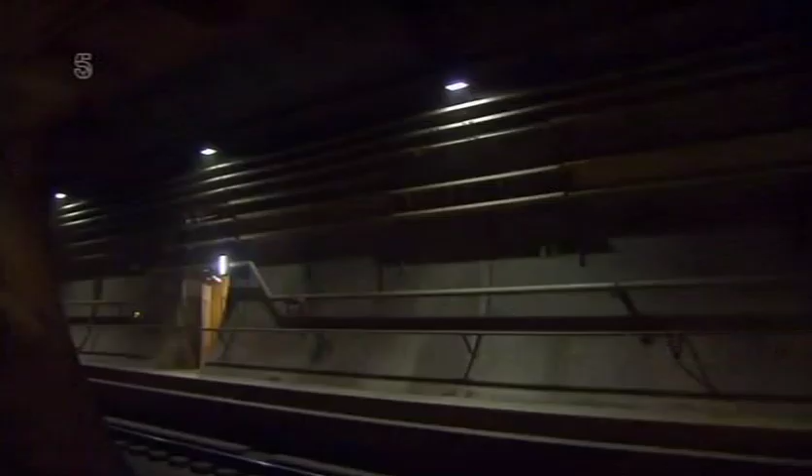The English Channel, 21 miles of open sea separating a country from a continent. We used to walk along those beautiful white cliffs very often, look across to France. For centuries, people had dreamt of a way to connect Britain to her continental neighbour. 25 years ago, they finally achieved that goal. At the time, it was unique. It was a great piece of work and a necessary investment.

The Channel Tunnel is an engineering triumph, but it would never have been built without the bravery and resolve of an exceptional group of people, the tunnellers. It was like being in a war with the earth, with the rock, the machinery you were using, with the air you were breathing. It was also a matter of pride. Teams from Britain and France tunnelled out from the shore, racing to be the first to reach the breakthrough point under the channel.

I was the first one to actually cross that line into France. It can only be done the once. Vive la France! Today, it's a vital part of our infrastructure, providing a high-speed link to mainland Europe. We get about 3,000 lorries. For passenger vehicles, it's up to about 10,000 vehicles a day. The drainage stations, the firefighting, the cooling and the ventilation. It's not just a concrete tube.

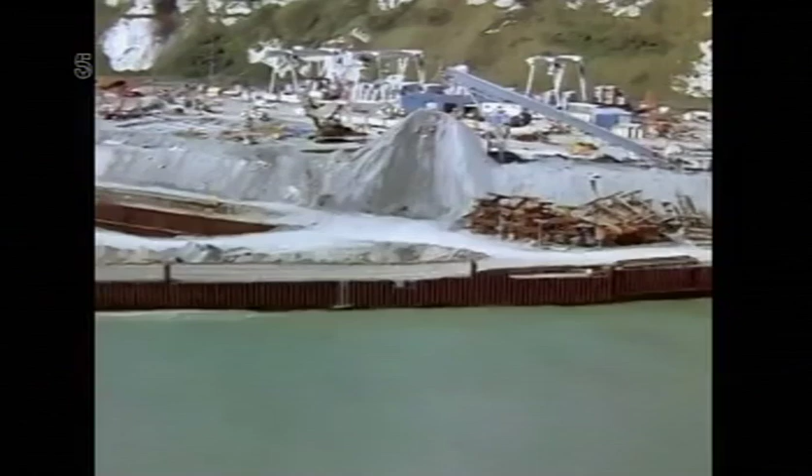Building the longest undersea tunnel in the world was never going to be straightforward. Its construction was blighted by a series of setbacks, including flooding. The project was on a knife edge. If this is not sorted, this could be the end of the Channel Tunnel. And fires. It didn't sort of occur to me how close I was to death.

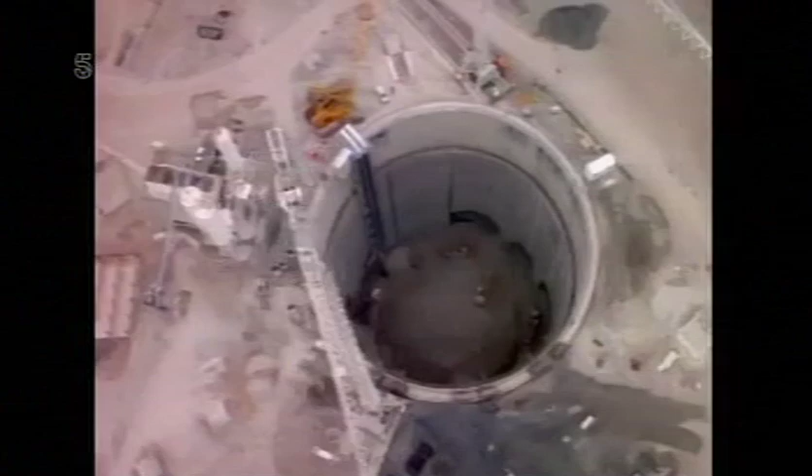And financial bust-ups. The simple fact was that it cost more to build. And it just took a lot longer than everybody had predicted. But eventually, through sheer dogged determination, these workers built one of the 7 wonders of the modern world.

This train is going on a remarkable journey. 25 miles under the seabed. It's travelling through one of the biggest engineering projects ever undertaken in Britain. It involved not just monumental challenges, but the goodwill of 2 nations, historic enemies who'd need to work closely together if it was to succeed.

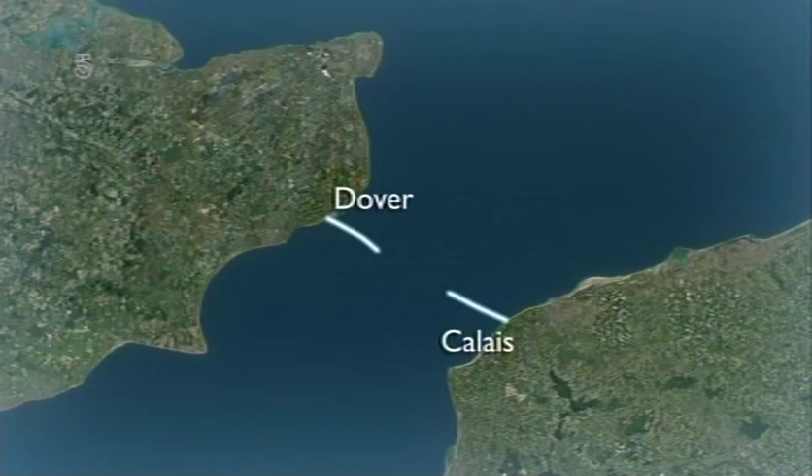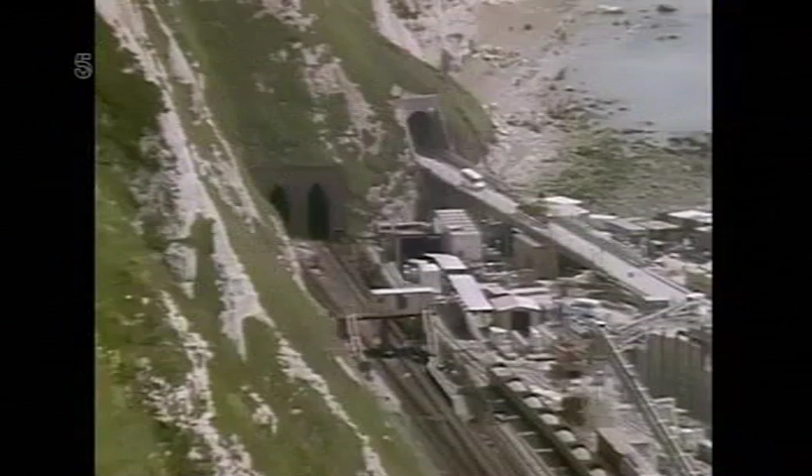From the beginning, it was an ambitious plan. Britain and France would dig out from either side of the coast, vying to be the first to reach the breakthrough point under the channel. Along the white cliffs of Dover, at the base of Shakespeare's Cliff, workers and machines were assembled. Then, in January 1987, work began on building the Channel Tunnel.

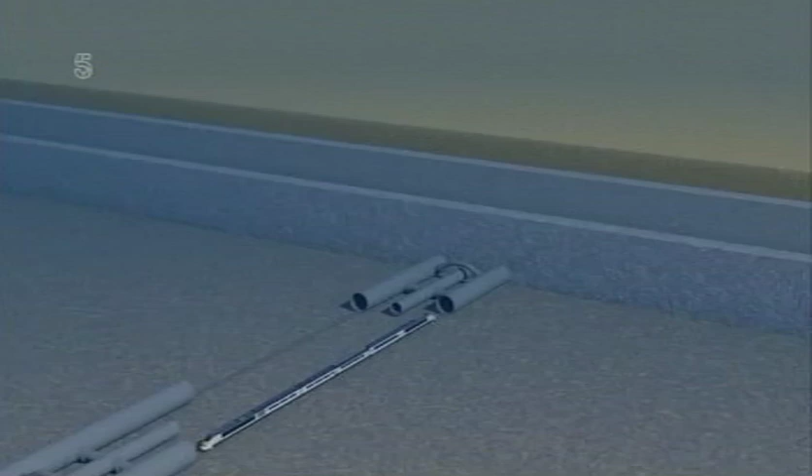We zip through it now, and we forget probably about the massive number of people involved in this project who have toiled under the sea for years to get this thing working. The Channel Tunnel didn't just involve building 1 tunnel, but 3. 2 tunnels would run either side of a smaller service tunnel in the middle, forming a new gateway to Europe.

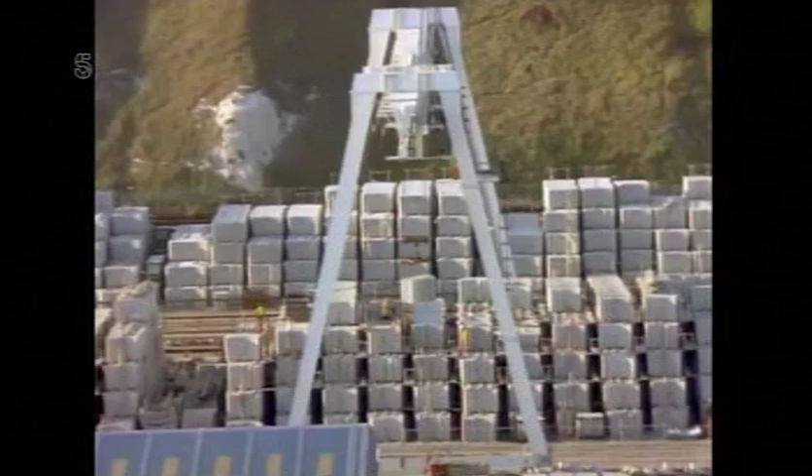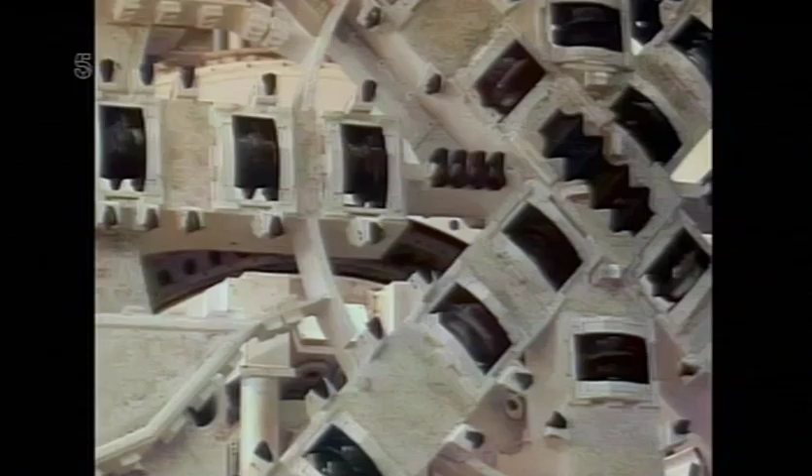The Channel Tunnel would take more than 5 years to build and over 1 million tons of concrete. Specially designed machines known as TBMs, subterranean Goliaths, could bore the tunnel at a rate of 5 meters an hour. It's awe-inspiring. It's like a monster. You can't stop it. Obviously you can, but it's just like a monster, just eating the earth and just spewing it out the other end.

Keeping this monster moving forward were 2 dedicated teams of men and women who worked day and night to ensure the tunnel's success. To me, it was an amazing engineering feat to be involved in. Yeah, I look back at it and think it was an incredible project to be part of. I say to people, I worked on the Channel Tunnel, and you feel like you've built it. I feel like I've built the Channel Tunnel. I look back on our time with pride. You know, we've done a good job. We've done it in fair time as well.

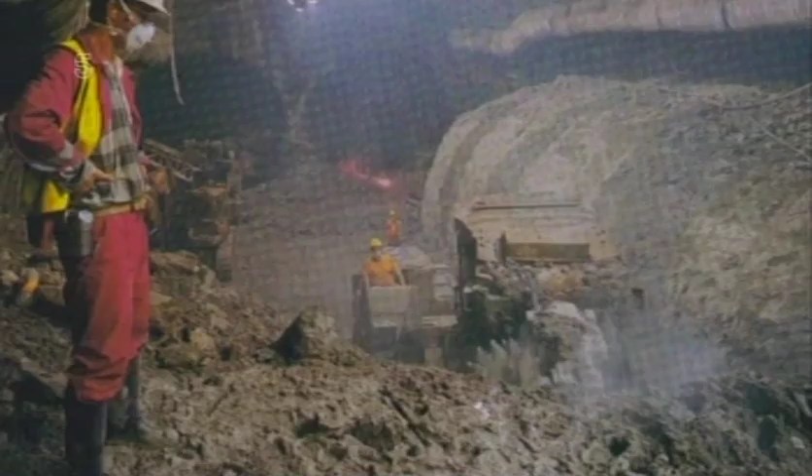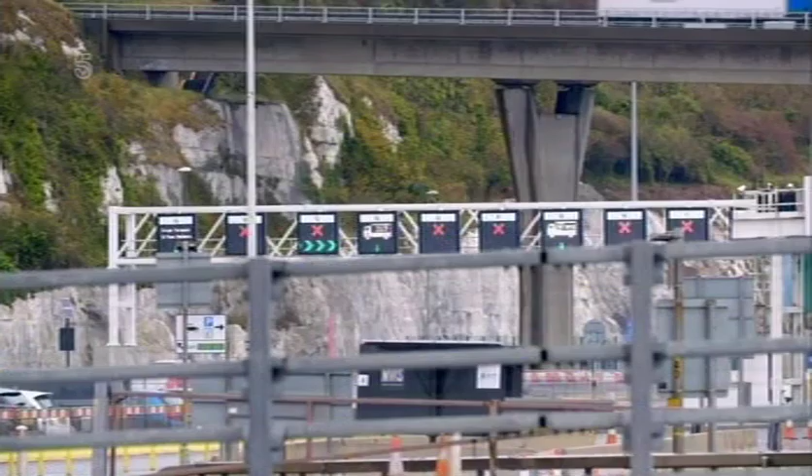Before the Channel Tunnel was built, if you wanted to get to France, the only cost-effective way was by ferry. Sailing across the English Channel could be unpredictable. Ferry crossings were often plagued with bad weather. You had to endure the problems of seasickness, perhaps, of fog in the channel, which is not infrequent. I don't like ferries because I think there's too much waiting around in queues. Ever since I got caught in a storm on a ferry on the crossing of the channel, I haven't used the ferries since.

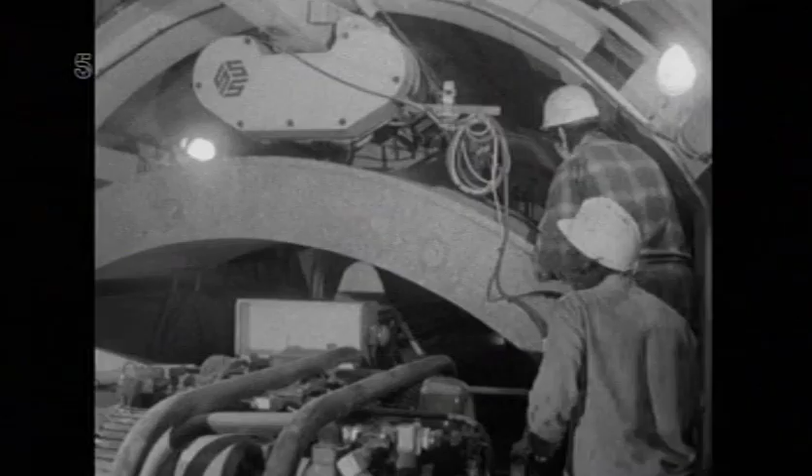It wasn't just passengers who were at the mercy of the elements. Delays were bad for business. A faster, more efficient way to cross the channel was desperately needed. The first modern attempt to build a rail tunnel under the channel began in 1974. In the 1974 dig, we were all going happily along, and then there was a change of government. And then suddenly we was looking at redundancy. It turned out to be a false start. The Labour government decided the Channel Tunnel was too expensive and cancelled the project.

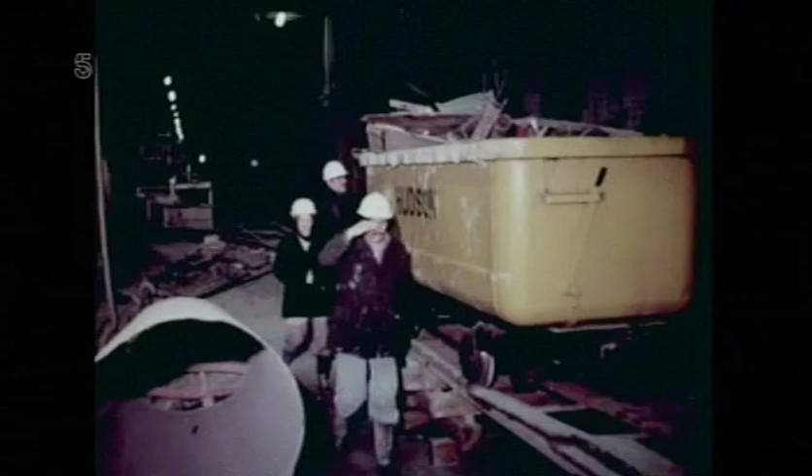For a decade, it was forgotten about. Then, in 1984, the most unlikely of allies got together to resurrect the idea. Britain's Conservative Prime Minister Margaret Thatcher and Socialist French President François Mitterrand announced they'd agreed to build a physical link between their two countries. But not everyone was happy.

We were one of the main players there, being Sealink, and we operated a number of ships on that route, and I was, of course, envisioning the ferry service would lose out if the Channel Tunnel was built. So the ferry companies joined forces in an attempt to kill off the Channel Tunnel to protect their businesses. They launched a blistering anti-tunnel campaign.

Its slogan, "Keep Britain an Island," struck a chord with some. Then, full-page newspaper ads played on fears that the taxpayer would end up paying for a white elephant. But Mrs. Thatcher had an answer to that. The project would be privately funded. She had an ideological position. It was that private's good, public's bad. And that was her very clear view. With the backing of both leaders, the project was back on.

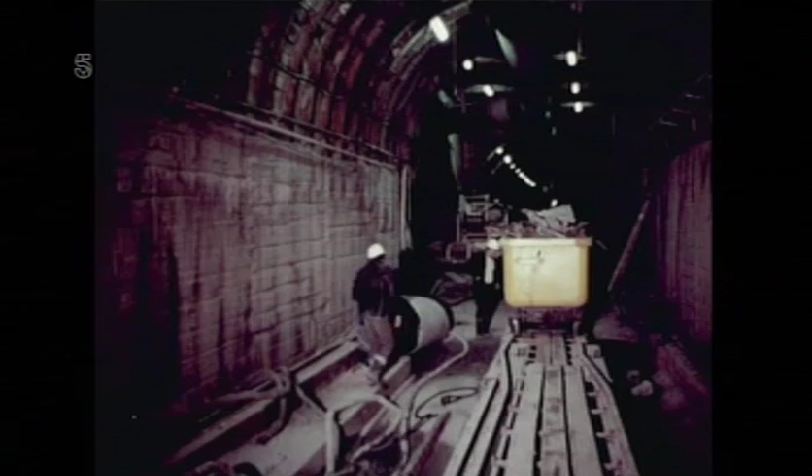Many people expected they'd simply carry on digging the tunnel that had been abandoned in 1974. The idea of just reviving the old plan was rather anathema to the government at the time, which wanted something exciting and daring. The words excitement and railway tunnel just didn't seem to go together. It was also well known that Mrs. Thatcher wasn't a fan of the railways. She never travelled on them. I suppose that was a good indication. She was anti-train, but she was very, very pro this project.

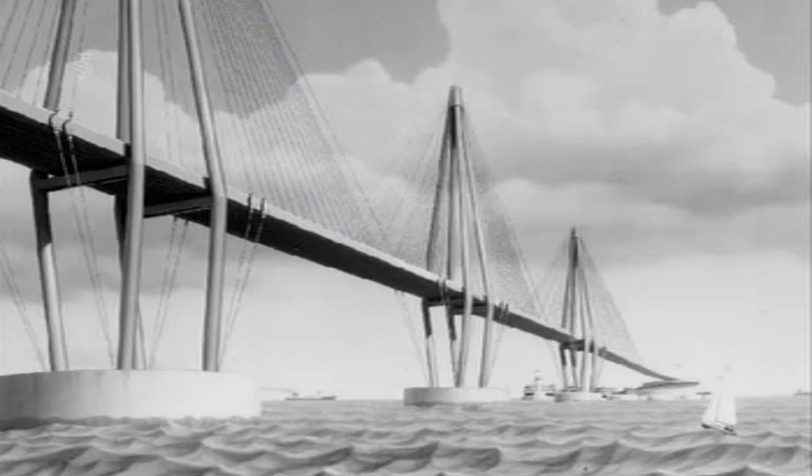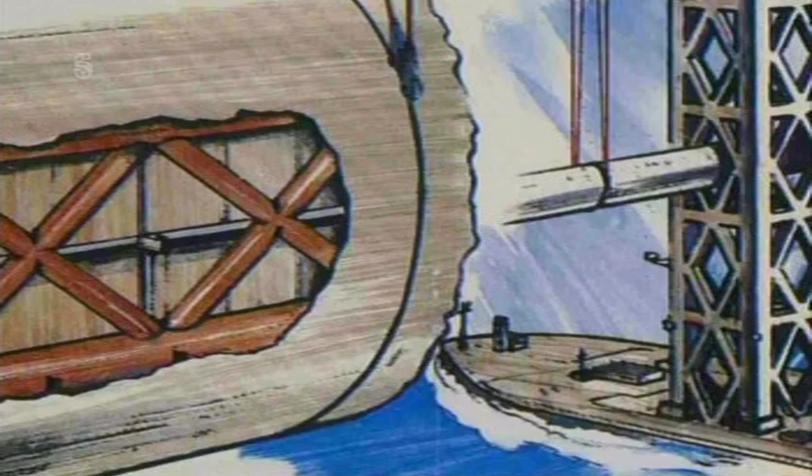There were several companies bidding for this historic deal, and they were all keen to come up with a plan that Mrs. Thatcher would favour. There were futuristic plans for road bridges and drive-through tunnels with hotels and marinas in the middle of the channel. There was even a scheme to build a motorway housed in a tube, suspended in mid-air. But for all these grandiose ideas, there could only be one winner. And it wasn't who everyone expected.

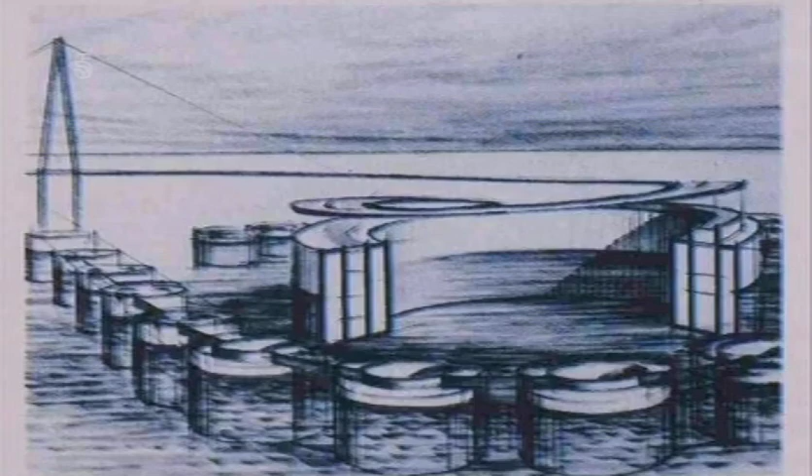The Channel Tunnel is an amazing engineering achievement, but the design we see today was never the favourite to get the go-ahead. There were all sorts of ideas about how to get across the channel or underneath it. There was a lengthy debate, and various construction companies came forward with different plans. April 1985. Companies were invited to submit proposals. There were 4 main schemes. The one thing most of them had in common was the ability to get in a car and drive to France.

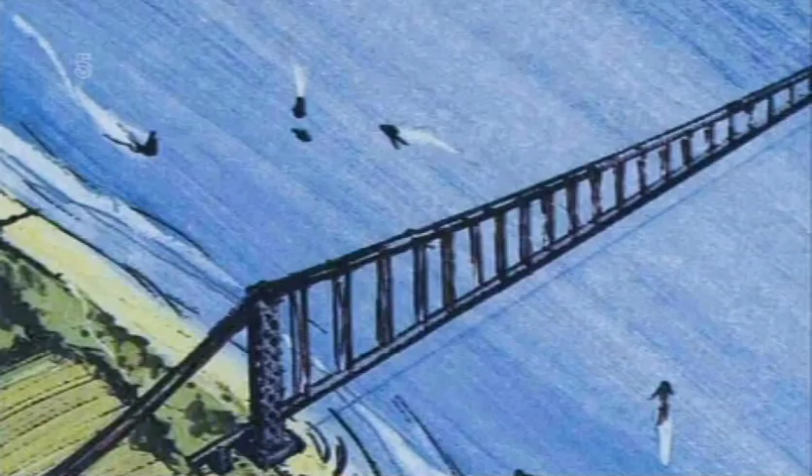Eurobridge proposed a double-decker drive-through motorway housed inside a tube suspended from a bridge. Then a train tunnel would run beneath the seabed. Eurobridge, uncosted, pushing the limits of technology. Nobody really thought that they'd be able to finance it.

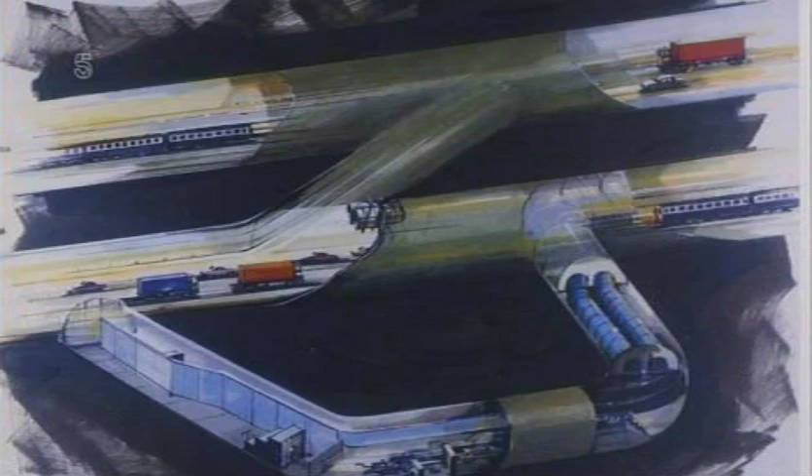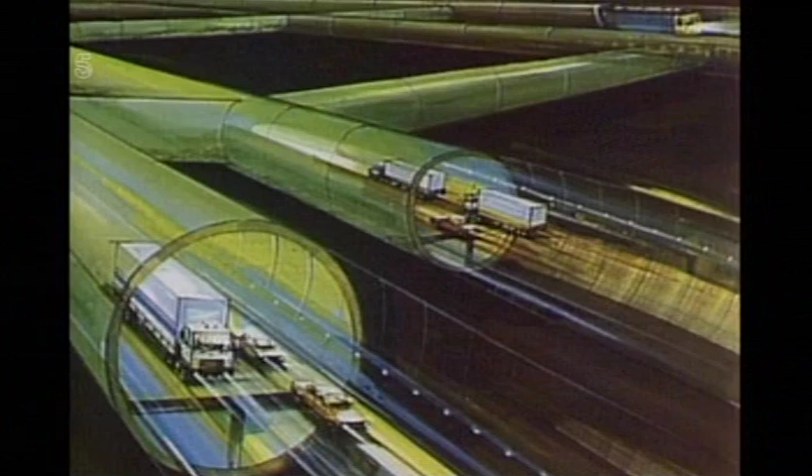The boss of Sealink Ferries also put in a bid. Called Channel Expressway, it was a mix of road and rail. 2 large tunnels would carry both trains and vehicles. We thought the ideal tunnel would be a drive-through. 20 minutes and you drive your car or your lorry through to the other side. To get rid of the exhaust fumes, you'd have had to build ventilation shafts in one of the busiest waterways in the world, where also there's a lot of fog and an awful lot of shipping. It becomes a huge risk.

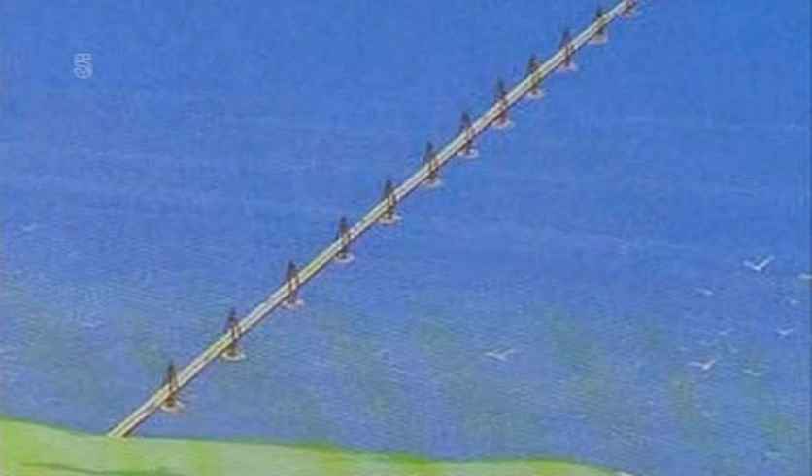The third bid, called Euroroute, featured a tunnel between artificial islands approached by bridges. It boasted that you could drive all the way to the continent. Of course, this was a terrible idea. I mean, think of all those ships sailing past that could easily hit those islands. It looks like something out of a sci-fi novel, even now.

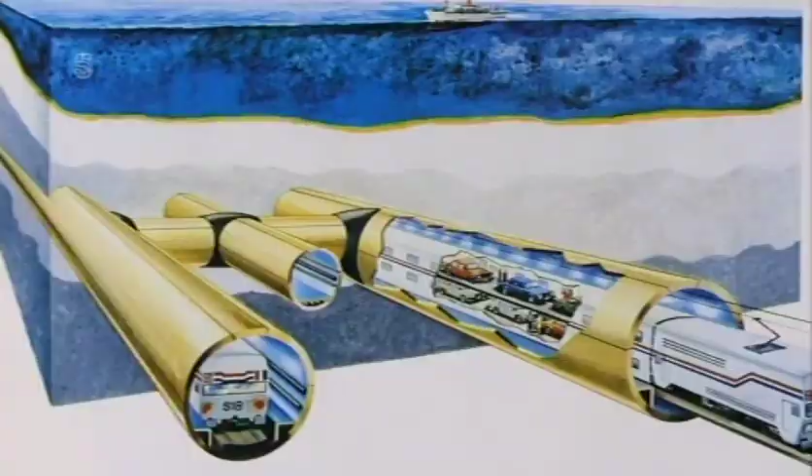Lastly, the Channel Tunnel Group's proposal was the only one not to feature a road. Cars and lorries would drive onto specially constructed railway wagons, while foot passengers could climb aboard a high-speed train. With the entire project privately funded, the banks were keen to back the most reassuringly straightforward plan. The Channel Tunnel Group won, I think, because if the banks were going to put a lot of money, the initial loan was £5 billion, they wanted reasonable assurance that this was going to be built on time and to budget or somewhere near it.

February 1986. The design for a rail tunnel had been agreed, and Mrs. Thatcher and President Mitterrand signed a formal treaty. But not everyone thought it was a good idea. There were definitely some very British types who didn't want us to have this fixed link, and apparently some even pelted Mitterrand's car with eggs. Some of them chanted "Froggy, froggy, froggy, out, out, out."

Opposition to the tunnel brought to the fore some bigger questions about the country as a whole. Is Britain European? Do we want to be connected with Europe, or do we want to be the single island on our own? So that nationalism is very important, and it divided the nation. It divided the nation about a tunnel. Despite the protests, the project got the go-ahead. December 1986. The first question: where exactly to start digging this tunnel?

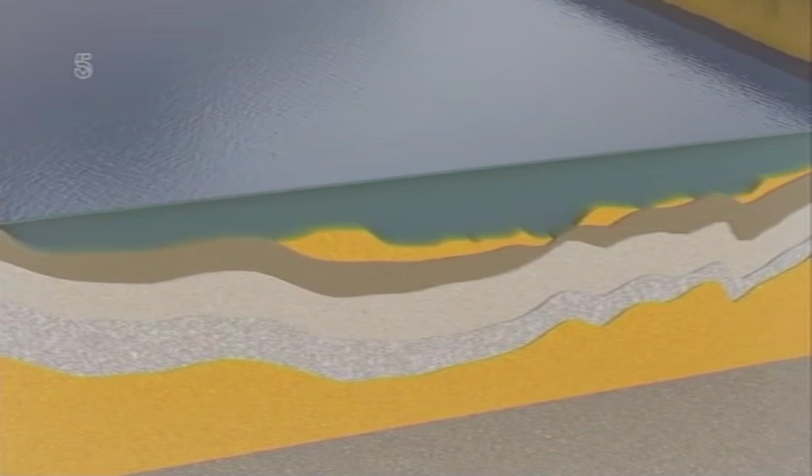Geologists had found a layer of rock they thought would be ideal. Called chalk marl, it appeared to stretch from one side of the channel all the way to the other. Chalk marl is almost impervious to water, so it makes excellent material for the tunnel boring machine to tunnel through. Impermeable chalk marl is a soft rock, perfect for tunnelling underwater.

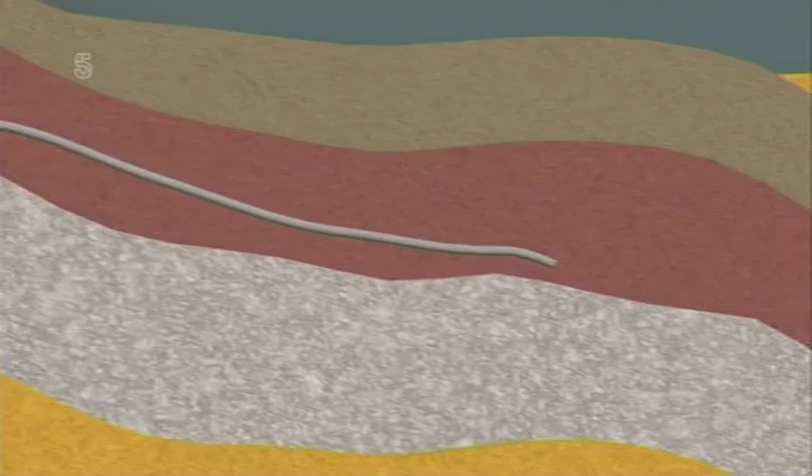But there was a drawback. Its path beneath the English Channel was narrow and undulating, making it difficult to follow. This meant a straight and level tunnel underneath the channel wouldn't be possible. Instead, the 3 tunnels would have to rise and fall, following the route of the chalk marl seam. The challenge for the engineers was making sure the passenger didn't feel like they were on a roller coaster.

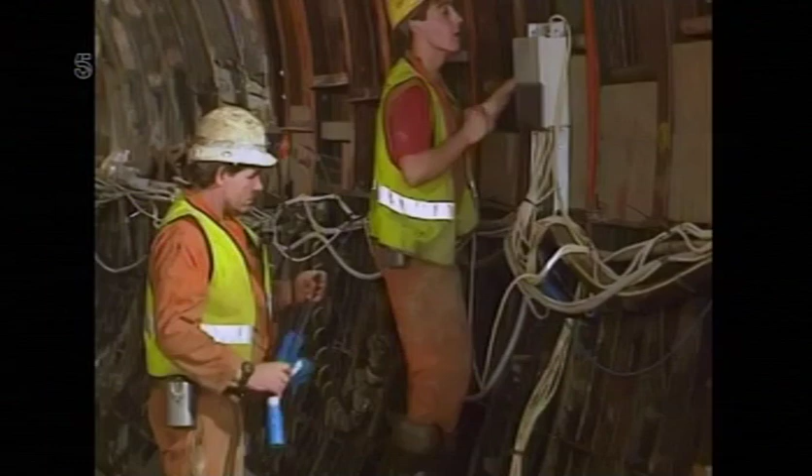To smooth the route, many different disciplines, from geologists to tunnellers, worked together. The conditions for the 13,000-strong workforce were demanding, so they needed a good reason to turn up for work every day. Why do you do it? Money. I left an office job in 1985, and my take-home pay was £404 a month. Channel Tunnel. The second year, 1990, I earned £58,000.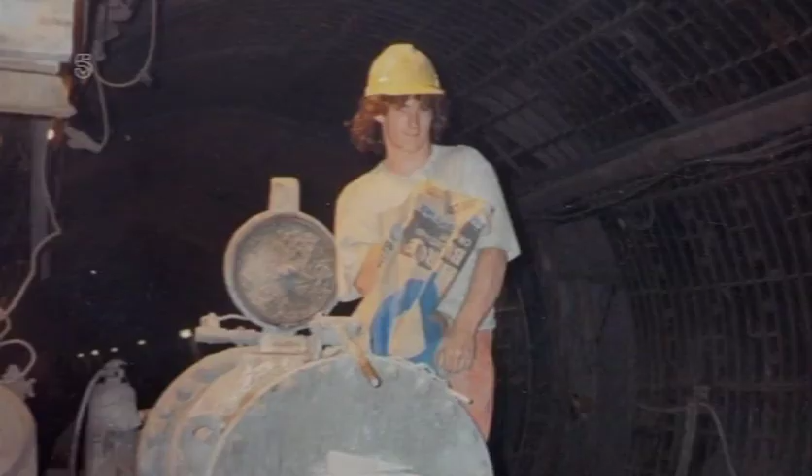John Gallagher was just 18 years old and living in Donegal when he was attracted by the cash on offer across the Irish Sea. When I finished school, I came to do the Channel Tunnel. My uncle worked as a pit boss there, and the rest is history. The Channel Tunnel's going to kick off. It's got permission. The project's going to be the biggest one in the world. And I thought, I want to go on that, I'll make some money.

The British were full of confidence. They soon bonded and came up with a name for themselves, the Tunnel Tigers. People make their mark on history, but I think the project put its mark on people as well. And that's what I did. I branded myself. So I come up with this design of a tiger, Tunnel Tiger, and that's it there. December 1987. And the race between the Tunnel Tigers and the French was hotting up.

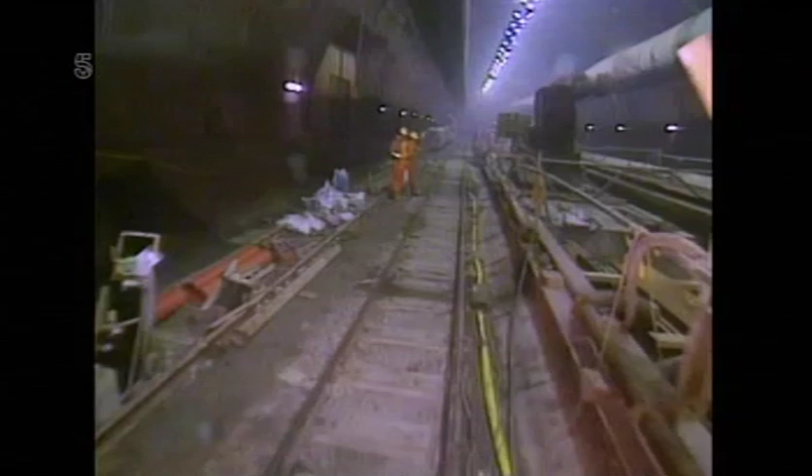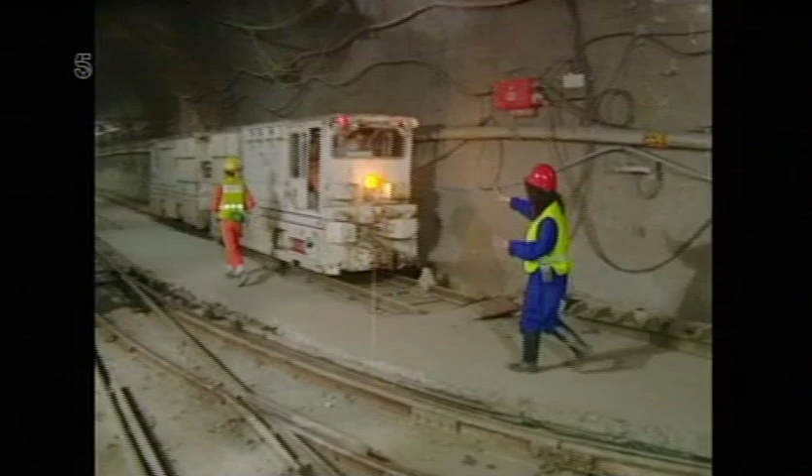This incredible feat of engineering captured the nation's imagination. Back in the 1980s, the science and technology program Tomorrow's World broadcast live from the tunnel. Updating the audience on its progress was presenter Judith Hann. The British and French tunnels are approaching each other at over 400 metres a week. The 80s were a really exciting time for science and technology, which was perfect for Tomorrow's World. We had the shuttle, we had Concorde, and of course we had the tunnel, which was a really marvellous project.

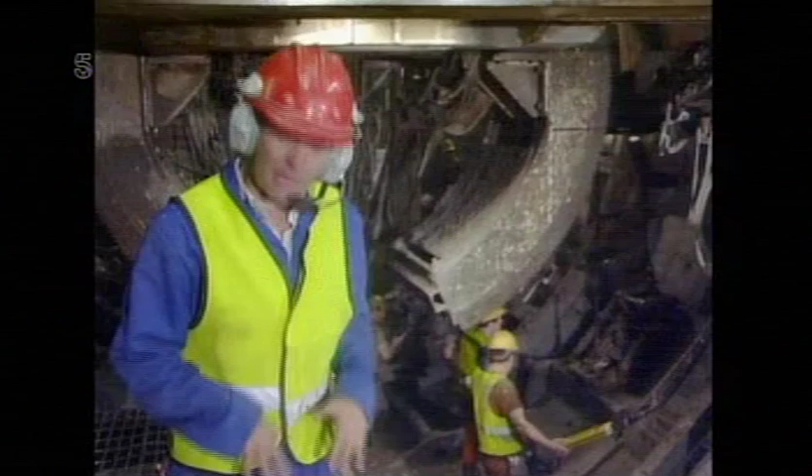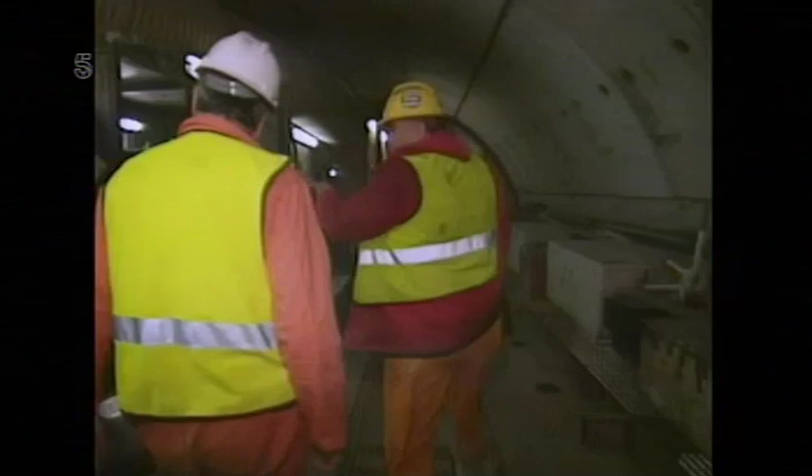February 1988. The tunneler's secret weapon, the tunnel boring machine, known as a TBM, was hard at work slicing through the rock face. This spot I'm standing on at noon today was solid rock. Now the cutting face is just 15 metres beyond this section here. There were 11 of these snaking monsters excavating the 3 tunnels. They contained workshops, restrooms, and even a first aid station. To drive one of these things, it's big, heavy, long, and dangerous.

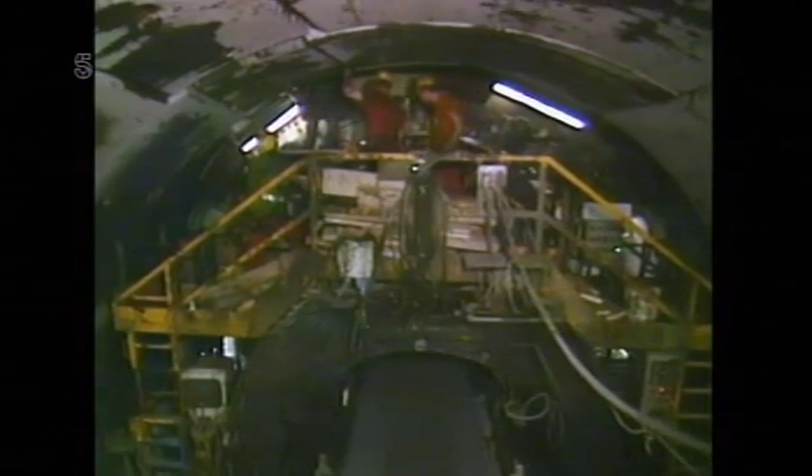Weighing in at around 760 tons, they were 250 meters in length, the size of 2 football pitches. Designed specifically for digging the Channel Tunnel, they were central to the operation. At the front was the 7.5 meter wide cutting blade. It could gnaw its way through solid rock, but the way the TBM worked was remarkably simple.

So we take the plastic tube as a TBM, and the TBM advances into the material, and as it goes forward, we remove the cut material from the back of the machine, advance and remove more material. And that is the basic tunnelling technique, and it doesn't change. It is always the same.

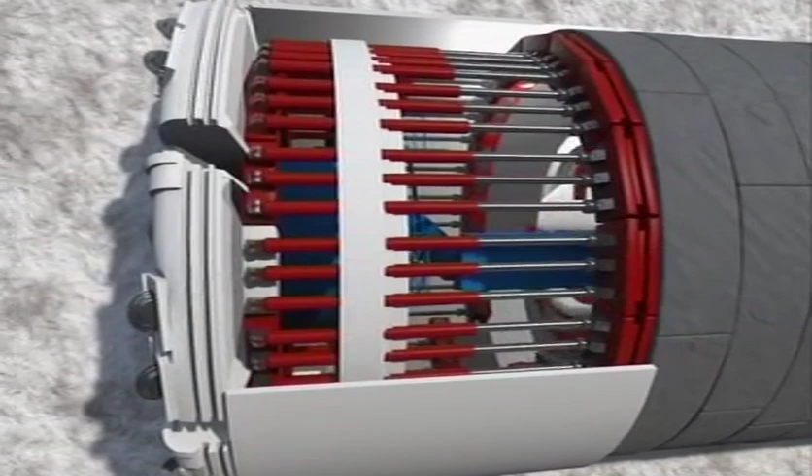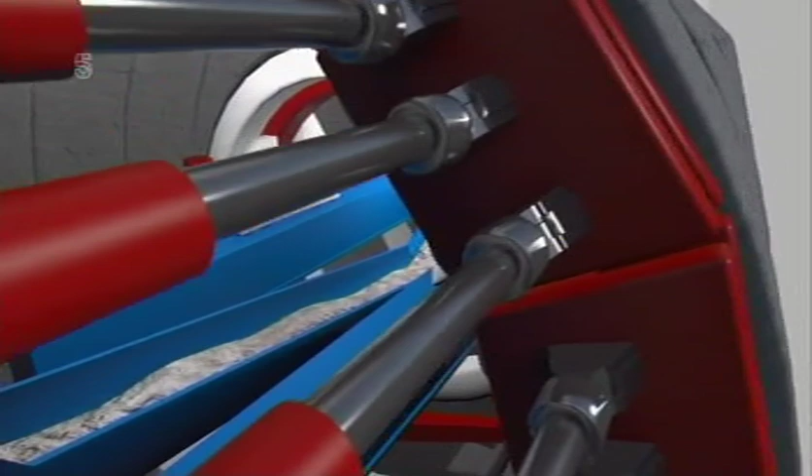As the tunnel boring machine cut through the chalk marl, it exposed fresh segments of chalk. These were lined with concrete sections and fixed in place with cement, forming a watertight ring of concrete. A conveyor belt carried the debris away from the cutting head. Hydraulic jacks would then push the cutting head forward. The most important job was making sure these Goliaths didn't stray off course.

Driving the machine, steering it, it could be actually quite stressful when it was going offline and it wouldn't come back. They don't forgive you. You do something wrong on a TBM, you will suffer. The tunnellers had to work safely and quickly. How much money they could earn depended on how many concrete rings they could erect to line the tunnel wall.

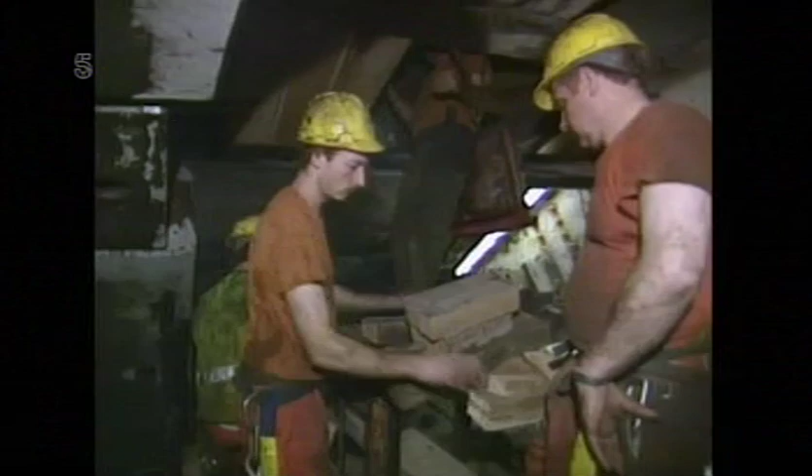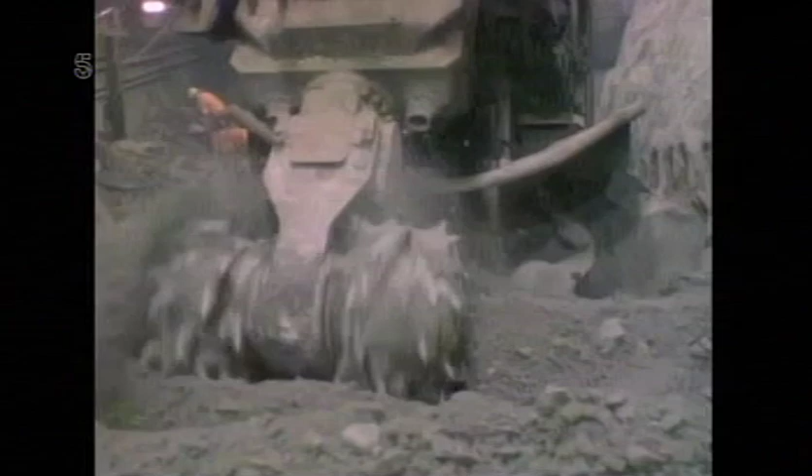There was a huge carrot dangled in front of you called bonus. And if you had a bad day and you didn't earn bonus, there were some long faces. As the British thought they'd be following an easier, water-free route, it was decided they'd tunnel a bit further. The midpoint, known as Point M, would see the British digging about 14 miles and the French around 10 miles. Point M was a point that actually wasn't quite in the middle, but almost in the middle, a bit on the French side. That was the one they were both aiming at to bring the two tunnels together.

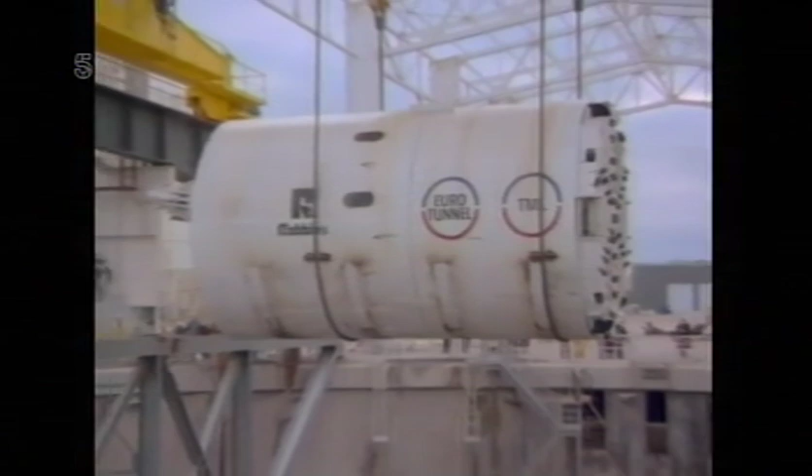The British expected the route to this point to be dry, so they gambled on tunnel boring machines that weren't waterproof. The French already knew they'd meet wet ground, and so had opted for TBMs that were completely waterproof. On the UK side, God was probably British. It was easy to stay in that layer. That means they had normally no problem of water. On the French side, due to the folding of the ground, we were obliged to create a new type of tunnel boring machines.

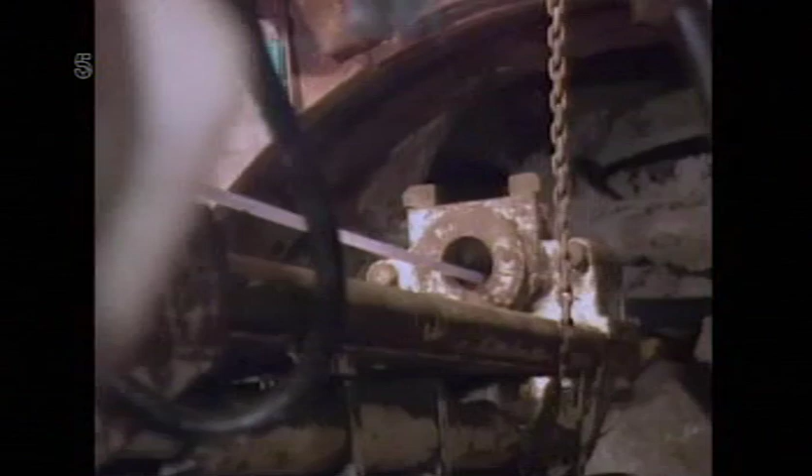These waterproof French TBMs were 25% slower than their less complicated British rivals, but if they hit water, they could keep going. The British were taking a calculated risk. To establish if the path ahead was dry, geologists continually probed the tunnel face, measuring the moisture content of the chalk marl. Geologist Helen Natras was in the cab of the TBM when they hit a problem. A jet of water was gushing out of the tunnel face.

So I jump out. So what is it? What is it? He goes, it's coming out of the end of the drill string, Helen. I thought, oh my goodness, what are we going to do? And then the miners were all going, oh, we're going to get flooded. So everybody thought, that's it, it's flooding. The only way for Helen to assess the seriousness of the problem was to measure the amount of water flowing from the leak. We need to take a measure of how much water's coming out.

So we had our bucket, and he holds it up, and the water's coming out so quickly it just bounces out. So Helen came up with a novel way to capture the water so it could be measured. We're going to use your plastic trousers. Get your plastic trousers off. So he gets his plastic trousers off, and then we managed to get the water in a more controlled fashion into the bucket.

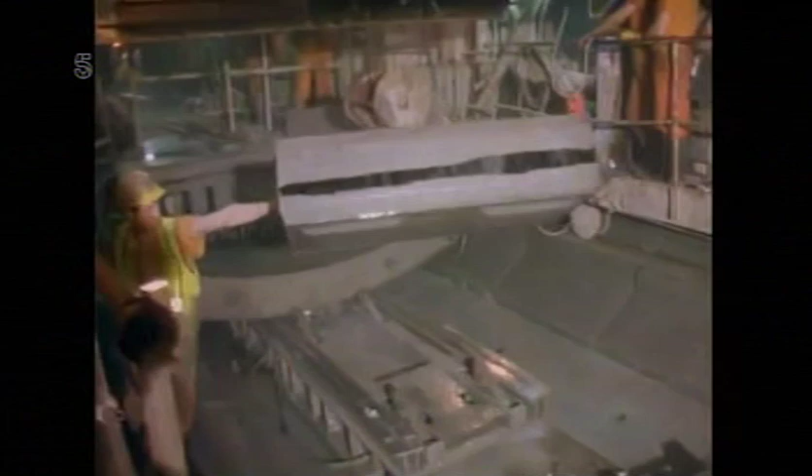There were only two places it could be coming from. I used my initiative and actually tasted it, and it wasn't salty. So we knew it wasn't coming from the English Channel. It was rainwater that filtered through, and it was trapped within the middle chalk, and that was filtering through the fault lines into the tunnel. Thankfully, this was a small leak, easily contained, but it was a warning sign. Small pockets of rainwater were trapped in ancient layers of rock. No one knew if much larger pools of water lay ahead.

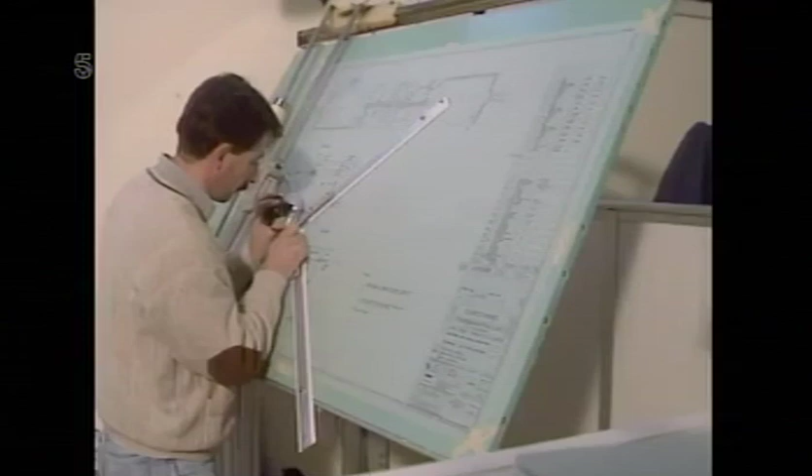This project wasn't just about building a tunnel. Above ground, engineers were debating what kind of trains should run through it. They needed shuttle wagons capable of loading and unloading articulated lorries. For passenger vehicles, there had to be two types of wagon, single-deckers for coaches and double-deckers for cars. These wagons would be the largest of their kind anywhere in the world.

For foot passengers, France had been operating high-speed TGV services since 1981, and so this type of train was the clear favourite. The TGV, which actually means the Train à Grande Vitesse, the high-speed train, is a record breaker. You know, it held world records for the fastest train in the world for many, many years. Compared to Britain's dirty diesels, and even our fastest train, the Intercity 125, French TGV technology was way ahead of its rivals.

The Eurostar trains looked futuristic in a way that most of British Railway stock didn't. You still at that time had your flat-fronted, yellow-painted, slam-door passenger stock. And these looked like something out of the 21st century. What made these Eurostar trains stand out was their speed. 100 miles per hour in the tunnel and over 180 miles per hour through the French countryside.

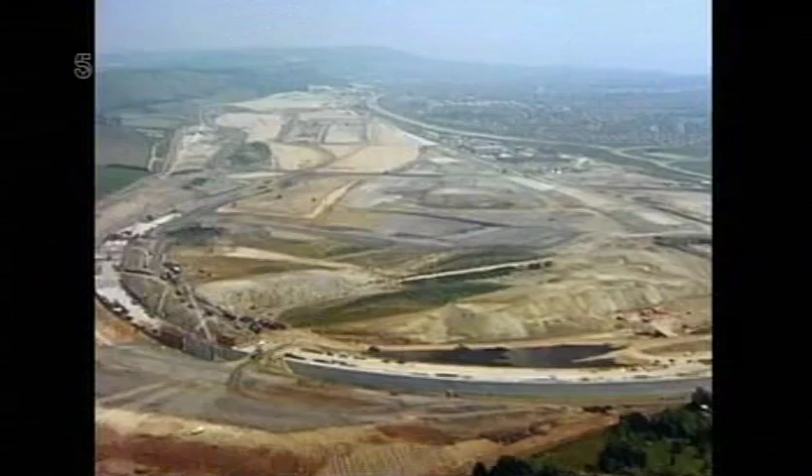Designing the train was only the beginning. The route it would take through the Kent countryside to the tunnel head at Folkestone was still to be decided. But it wasn't that controversy that threatened to derail the project. Fears were mounting that the tunnel might bring a deadly disease to Britain.

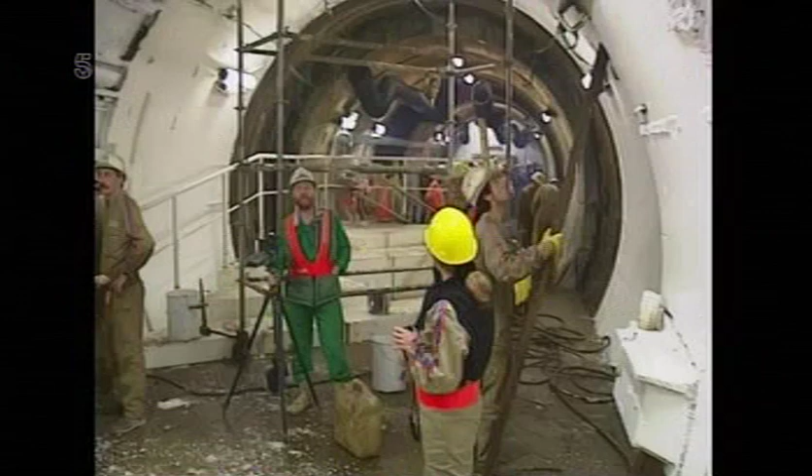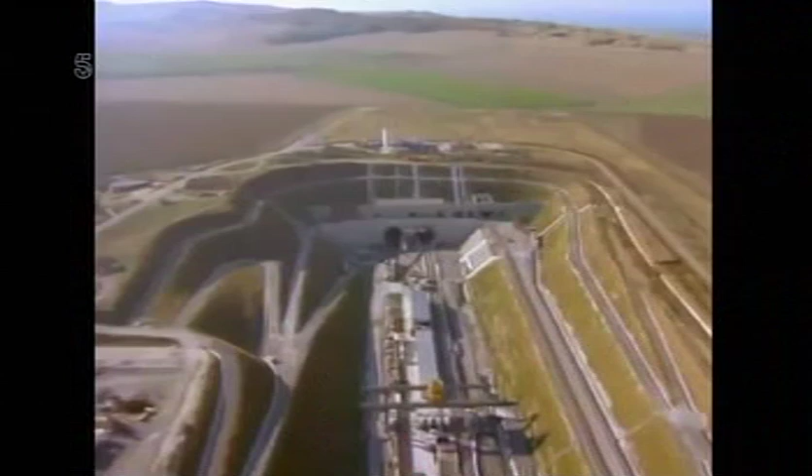The Channel Tunnel was the largest underwater construction project the world had ever seen. Teams from Britain and France would tunnel their way to a breakthrough point deep under the sea. Well, this, of course, was a massive, massive project between two massive teams. And suddenly we had collaboration on a truly epic scale. It was something unbelievable to many of us when it first opened up, and it is to me now.

The tunnellers on both sides were focused on sticking to their demanding schedule. This was a 24/7 operation, so the men were housed in temporary accommodation on land close to the tunnel entrance. This was home to electrician Kevin Milne. Back then, prefabricated huts housed over 1,000 workers. There's not much to see today, but the memories are still vivid.

My home for 3.5 years in the 80s, 90s. A lot of memories already, looking at the place. I look around, my block was just here on the right, D3. I think it was the second tier up, that direction a bit.

And I look at it now, 30 years later, and it's a weird feeling, obviously, but it's like looking at an ancient monument. Like, you know, you see people go to Stonehenge and they go to these ancient barrows from our ancestors, and I look at this and it's a monument to the guys who worked on the tunnel and who lived here. Amazing. Sorry.

The bonds forged between the men who lived and worked here were strong. Happy memories, sad memories, a lot of laughter, a lot of tears. A lot of great guys, some comedians, some characters you wouldn't believe existed in this world. Hard-working men. I didn't stay anywhere else. It was that good. And I went to have a look at digs in Dover. I've seen better pigeon lofts. Like to work hard, like to play hard. All good pals.

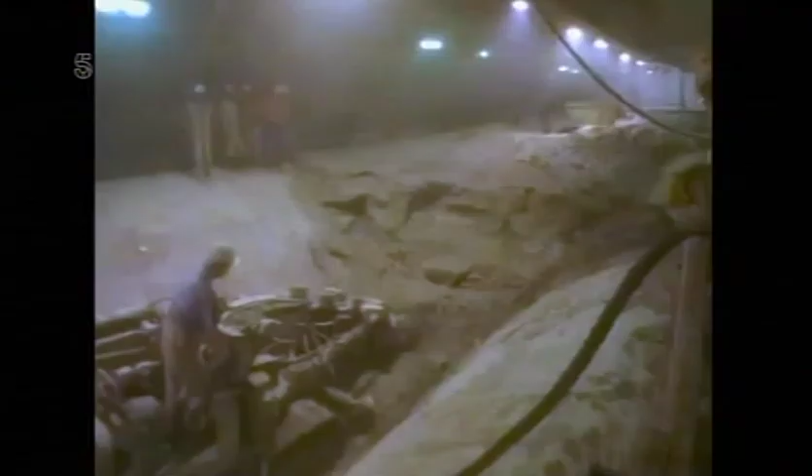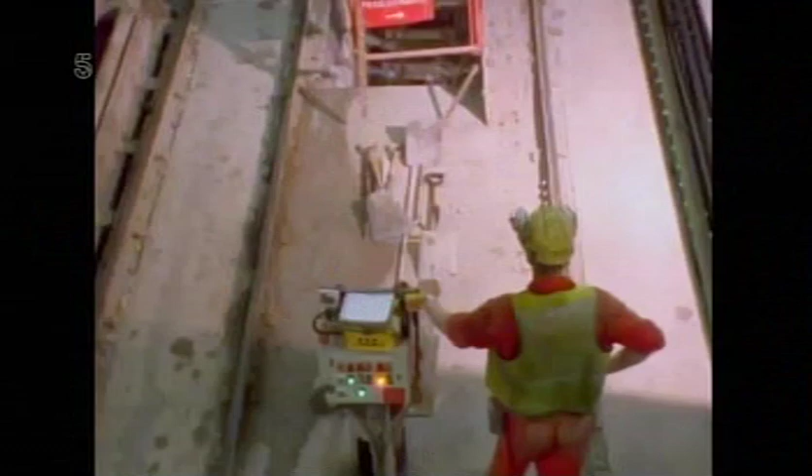The tunnellers had to rely on each other because this was one of the most demanding and dangerous workplaces in the world. You had your shift to do, you had your target to reach, you had your pit bosses who are strict enough. It's just hard work. We didn't have a lunch break, we just kept going. You worked. You grab a cup of coffee and a sandwich when you could. Hot, claustrophobic, you name it. It's not a place where somebody who doesn't know what they're doing should be anywhere near.

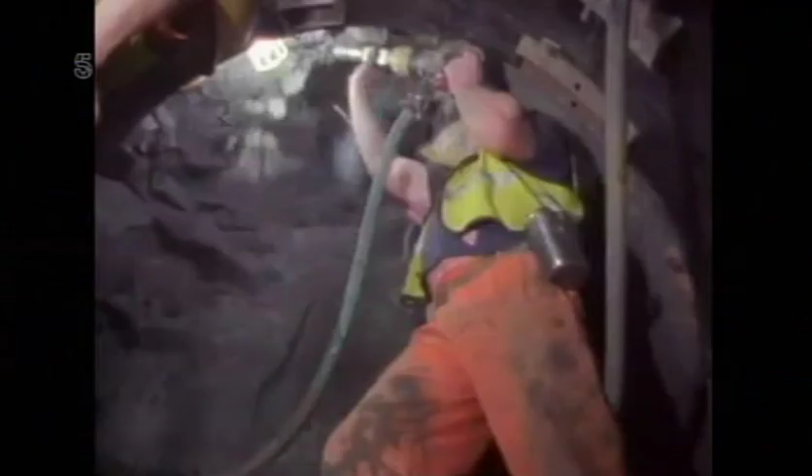While the tunnel tigers pushed on with their punishing schedule of three 8-hour shifts a day, above ground there was a new danger. A fear that the tunnel could allow a terrifying disease to reach Britain. Rabies. It's a rare but serious infection that can be transmitted by animal bites and is especially common in foxes. Symptoms include frothing at the mouth and paralysis. Was the tunnel about to fast-track the disease to Britain?

A lot had been done firing vaccine pellets at foxes from helicopters, putting down bait, which included the vaccine. Outside, around the terminal sites, there'll be high security fencing. And that's not just to keep out people, but also animals, another matter of public concern.

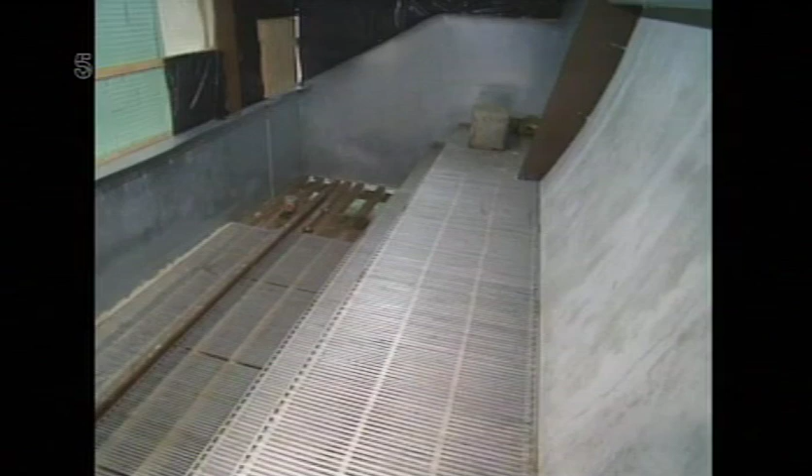The problem was taken so seriously that a replica of the tunnel was built to test ways of deterring animals from coming through it. This is what they came up with, this electrified grid. It works on the principle of an electric cattle fence. It gives a shock, which is not enough to seriously hurt an animal, but enough to warn it off. I think they were paranoid about rabies, paranoid about foxes. The fears were unfounded. In 25 years, not a single rabid animal has come through the tunnel.

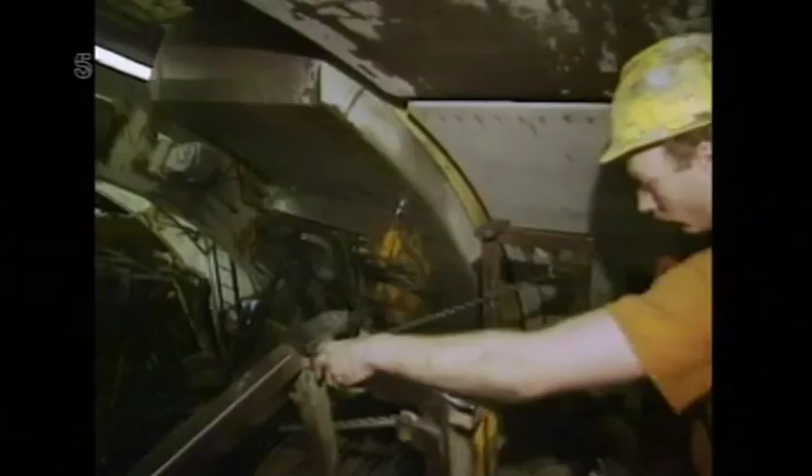March 1988. The tunnellers were making good progress, but the schedule was relentless. Living and working for long periods away from home took its toll on the tunnellers and their families. All the phone boxes, green, I remember them all, one after the other, and guys would be arguing with their wives and smashing their handset off the box, and just all their emotions pouring out in the telephone box. 12 people all having arguments with wives, other people telling their wives how much they loved them, talking to their kids, and everybody's life was just laid out in front of you while you waited for your turn.

As the tunnel progressed, just getting people to and from work every day was a major challenge. Here we have an old TML man rider, and these were going in and out on a regular basis, carrying personnel who'd finished their shift and personnel who were starting their shift. This material was added for a very good reason. It's a safety measure. I've spent many an hour dozing as we went in and out.

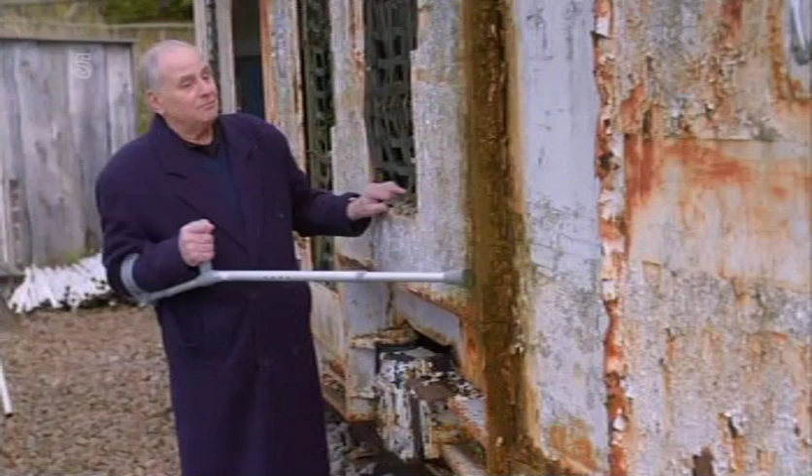We weren't supposed to, but if you're tired and it's a long journey, you're bound to just nod off a little bit, and you could go arm out, leg out, and before you know it, you've got an injury, a serious injury. So that's why these were added. Good little machines. We used to look forward to seeing them come in, and we used to look forward to seeing them go out. But yeah, it's good to see one again after all these years.

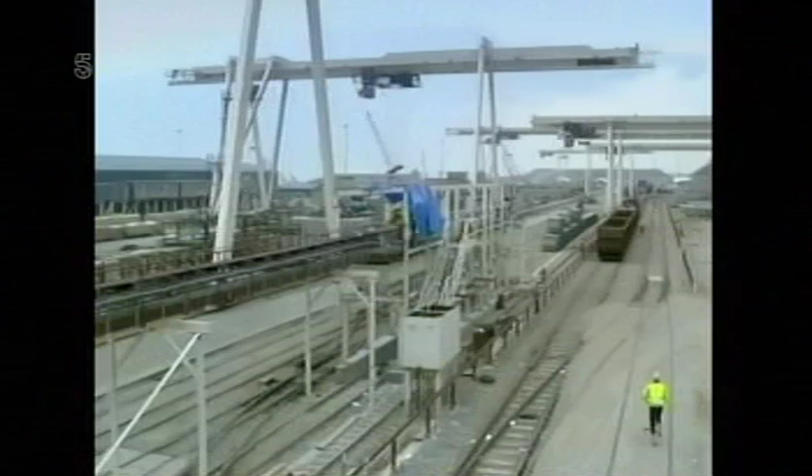There were 183 locomotives running on over 150 miles of track. With no form of signalling, the potential for chaos on such a crowded system was considerable, especially as this railway never slept. At the peak of production, they carried 2,000 tons of newly mined chalk back to the surface 24 hours a day, every day.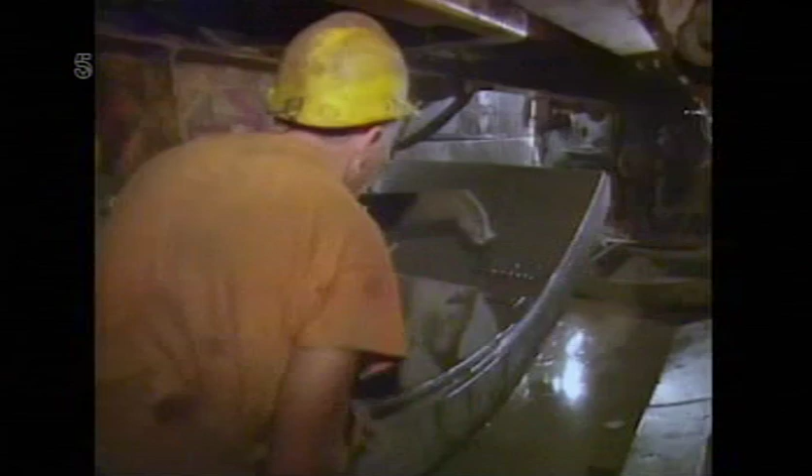For the workers riding these locomotives, it could take hours to get to and from this underwater construction site. Boredom could easily set in, and alcohol and cigarettes were banned. But some tunnellers found ingenious ways to buck the system. I saw him go in his locker and he got a big juicy grapefruit out, put it on the bench next to him. Thought, that's what he's having for his lunch.

No sandwiches, and then I saw him look around like that, like a secret agent, looking over his shoulder, and then he went in his locker and he got a syringe out, and I thought, oh my God, he's going to jack up with some sort of drugs, heroin or something. And then the next minute he gets a little half bottle of vodka and he sucks the vodka up into the syringe and he injects it into his grapefruit. So he had obviously had a lovely tea break. 4 hours later, the nice vodka grapefruit cocktail.

Guys did smoke. Like, they used to hide their cigarettes in spirit levels and stuff like that to get them past the security. Rules were broken all the time, but I didn't break any. There were 1,100 British workers underground, and the vast majority were men. There are one or two die-hard tunnellers who actually don't like women down here. Yeah, but we win them over. We show we muck in with the guys, we get covered in mud, that sort of thing, they accept us.

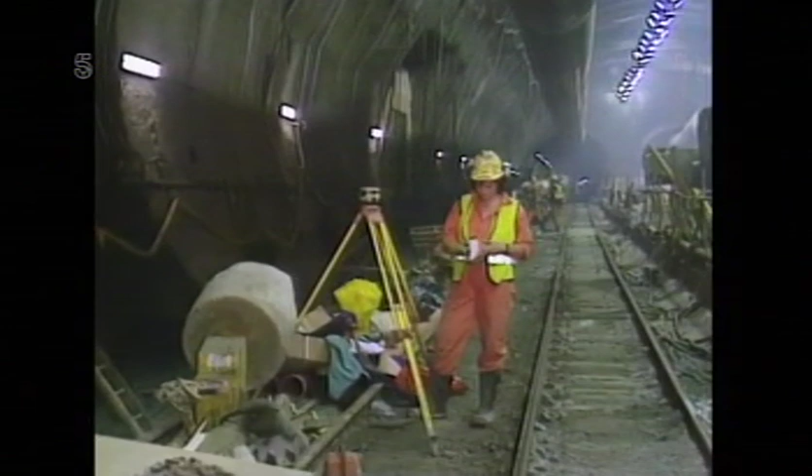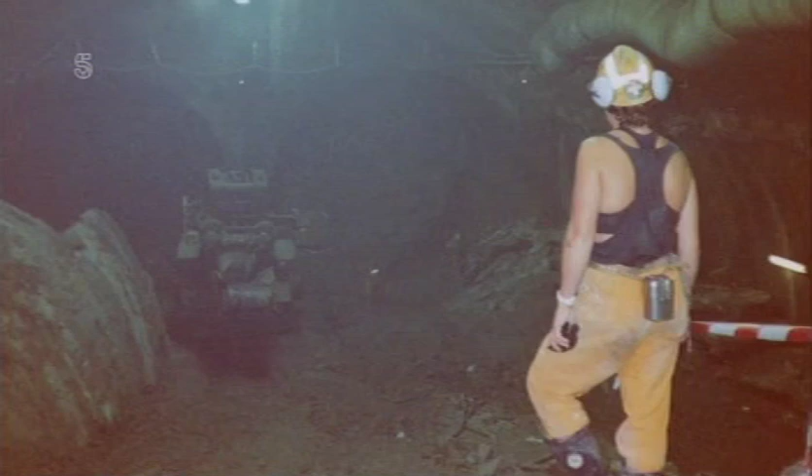A chance phone call from a colleague attracted engineer Sarah Chapman to the project. We need some more engineers on the Channel Tunnel. It's a temporary job, but it might lead to a permanent job. Are you interested? Before long, Sarah was underground with a crucial role to play. It was really making sure that the tunnel went in the right direction, that it was big enough, that it wasn't tilting forward, left, right, top, bottom sort of thing.

Sarah was one of only a handful of women working underground. There were no toilet facilities down the tunnels. You've got to allow what often was about an hour to get in, an hour to get out. So there's sort of 10 hours where you actually don't have access to a toilet. That was fairly difficult. And I do remember actually raising that issue and was pretty much laughed at and told, well, you want to work here, you want to be one of the men, just deal with it, get on with it.

Some tunnellers had bizarre reasons for believing this was no place for a woman. And you wouldn't want a lady on your shift? I don't think so. No. Perhaps the easiest way of getting out of it is to say I've inherited a little bit from the Japanese, having worked with them for a while. They believe that the underground god is in fact a goddess, and to have a pretty young lady down the tunnel would possibly offend the goddess, and therefore the water in the face would come in.

As a female, there were times when it was quite difficult, and I'm sure the other females on the job felt the same, and we've made huge leaps forward, although there are still not that many female engineers in all sorts of engineering. Sarah would spend over a year working underground, ensuring the path of the tunnel remained on course.

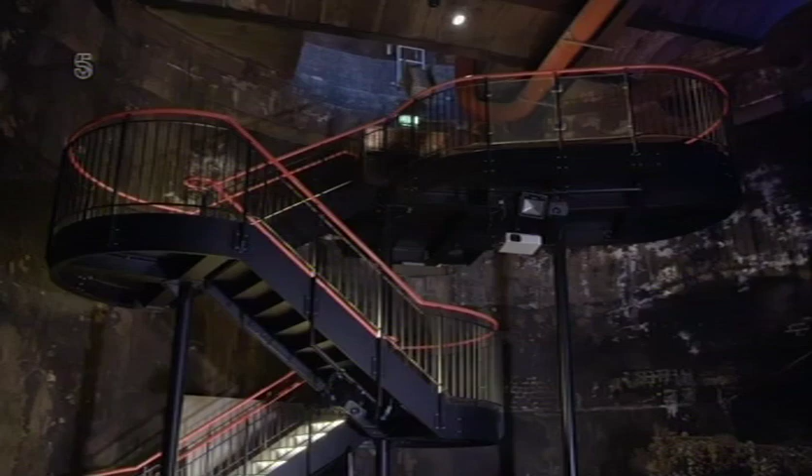Marc Brunel, father of our most famous engineer, Isambard Kingdom Brunel, actually built this huge chamber above the ground and sunk it. So this is 50 feet in diameter. It's about 1,000 tons in weight. It was built on an iron ring, and it is, in effect, a massive pastry cutter. The whole shaft gradually sank under its own weight, slicing through the soft ground.

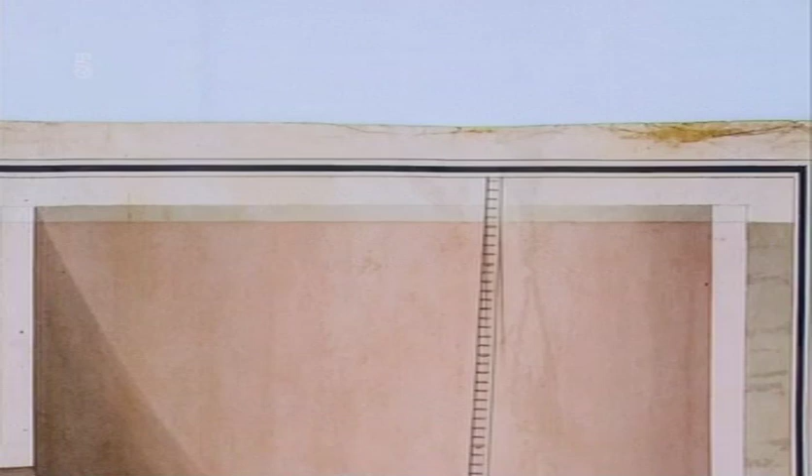From this shaft, a tunnel was dug underneath the Thames, beginning in 1825. Marc Brunel's genius was to come up with a revolutionary system he called a tunnelling shield. Individual cages big enough for one man to work in, a primitive version of the tunnel boring machine. In each cage, each man or tunneller has a wall of planks, and they're held in place by metal poles.

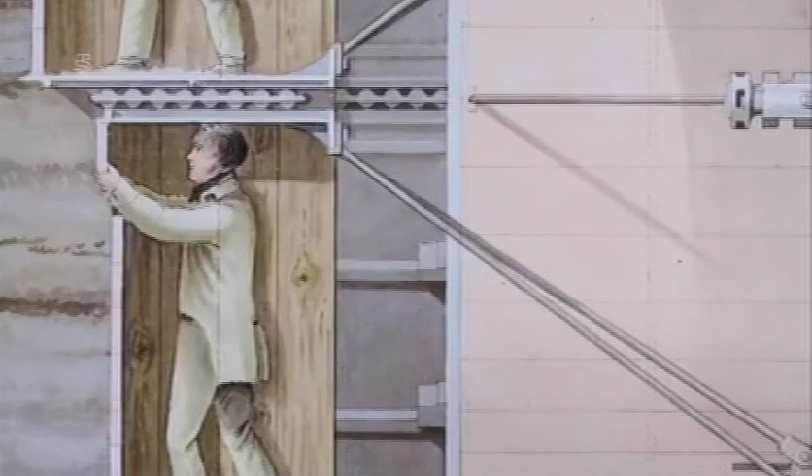And each man in each cage takes out the top two poles, takes out the plank, digs to 4 inches, which is about the size of a brick, replaces the plank, replaces the poles, takes out the one below, digs to 4 inches, replaces the plank, replaces the poles. So it's incredibly laborious. It's also dangerous, as the tunnel flooded many times. Eventually, it was completed 18 years after it was begun.

This is not just the first tunnel under a river anywhere in the world. This is the birthplace of the underground. This is the tunnel that changed the shape of our cities and changed the shape of our lives. The Channel Tunnel had similar grand ambitions, but it also faced the same problems that Brunel had encountered. March 1988, and the British tunnellers hit the one thing no one wants to find when digging under the sea: water. This time it was pouring in. If they couldn't stem the leak, the project faced disaster.

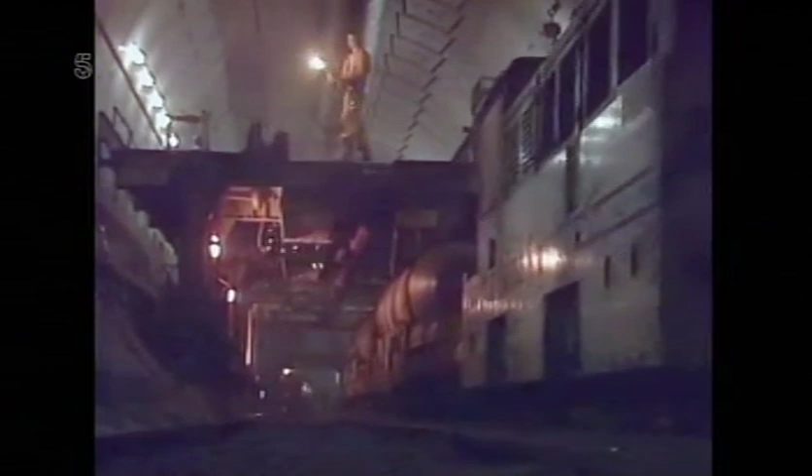March 1988. Surprisingly, for a project of this size, it was on schedule and making good progress. But that success brought with it a huge problem. Where to put the 4.9 million cubic metres of rock and earth removed from the tunnel? The stuff tunnellers call spoil. On the flat French shoreline, space wasn't an issue. But 50-metre cliffs on the Kent coast meant land was at a premium.

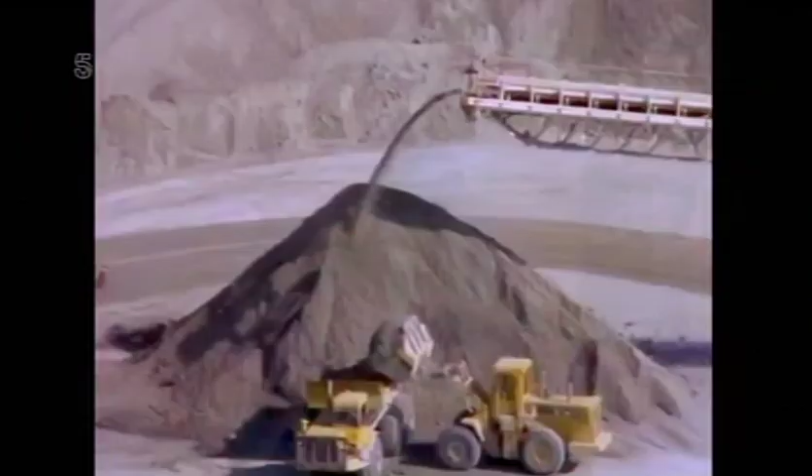There's lots of ideas about where to put the spoil from the Channel Tunnel. In fact, there's about 70 different options given, from filling in quarries in north Kent to filling in valleys on the edge of Dover. There were concerns that giant slag heaps would scar the picturesque Kent countryside. I can remember getting into an argument with the man who was in charge of the tunnel because they were taking all the waste out and dumping it. And one of my arguments at the time: where are you dumping all your rubbish?

There was a big question of the spoil disposal, where all the material would go, and lots of studies were done with environmental groups to make sure that it had as limited environmental impact as possible. The solution was as ingenious as it was simple. It was decided the best option was to put it at the bottom of the White Cliffs of Dover here. And the advantage of it was there were no lorry movements of chalk marl anywhere around Kent. You can imagine if 4.9 million cubic metres shifted by lorry, it would have been a huge disturbance to the local communities.

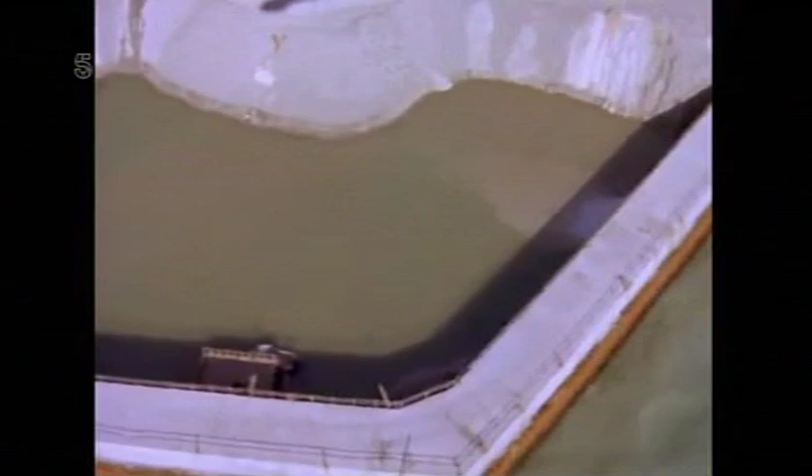To avoid this problem, an artificial lagoon was constructed at the tunnel entrance to hold the spoil. The wall of the lagoon contained 32,000 tons of steel, the largest sheet steel structure ever built. And once all the spoil had settled and dried, Britain had grown by 86 acres. Today, the area is a nature reserve called Samphire Hoe, a new part of Britain where you'd never guess the ground beneath your feet came from deep under the sea.

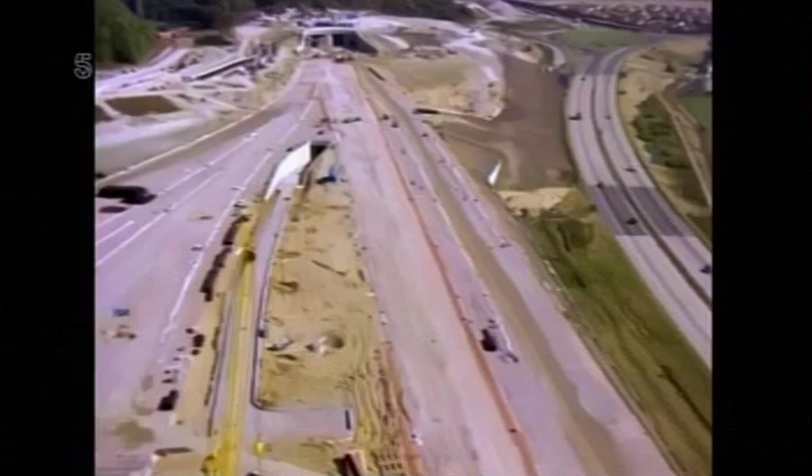Even I find it difficult to believe, really, that it was a massive industrial work site. But you look at it now and you think, wow, that's a huge change. The vegetation has grown so much that we can have sheep and cows grazing it, and the number of plants has increased enormously. It's an amazing story. But this story looked like it might have a very different ending. In March 1988, the British tunnellers hit the one thing they feared most.

We got down there and it was literally like Niagara Falls. It was coming in round about 300 to 400 litres per minute. They'd gambled on a dry run, but it hadn't paid off. Thousands of litres of water were flooding the tunnel on the British side. In places, it was coming in with the force of a fire hose. It was just an ongoing battle trying to pump the water out as it was coming in. It was very wet and it was horrendous, terrible. The water was coming in quite badly. It was like a car wash in places.

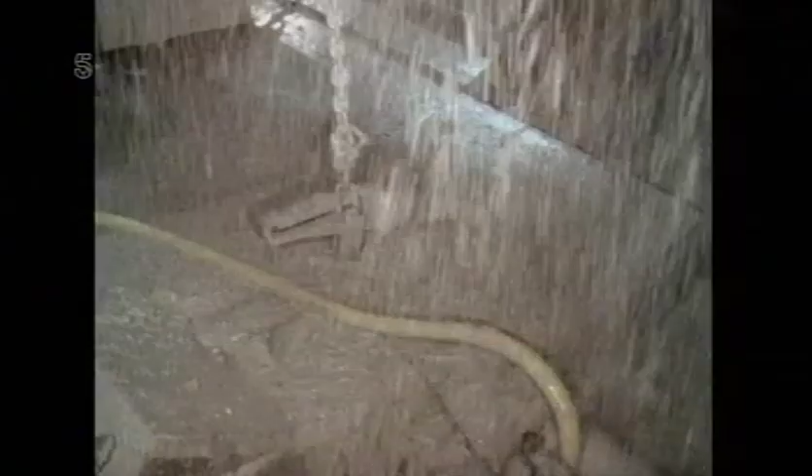Then, a crack started to appear in the tunnel roof. So you then have bits falling out of the ceiling with guys trying to work underneath, trying to put in these concrete segments waist high in water and mud and slurry. And so, yeah, that was pretty dangerous. If the leak couldn't be stopped, they risked the tunnel collapsing. The British needed a solution, and they needed it fast. It's every miner's nightmare, mate, to hit water. We were scratching our heads. Why should it be like that? But you think, nah, this won't collapse. If this is not sorted, this could be the end of the Channel Tunnel.

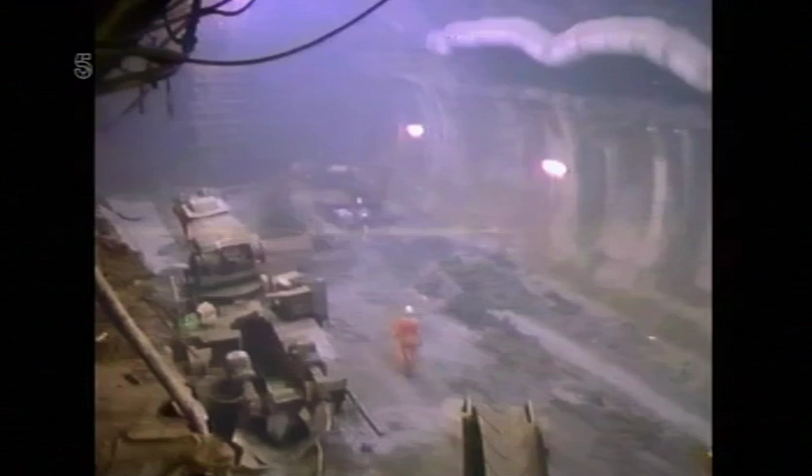Next time, a grand opening with a royal delay. One of the papers called it a royal cock-up. An engineering first. It was like being inside a cathedral. Absolutely huge. That was exciting because nothing like that had been done before. And a catastrophic fire. If we'd have been in there, probably...